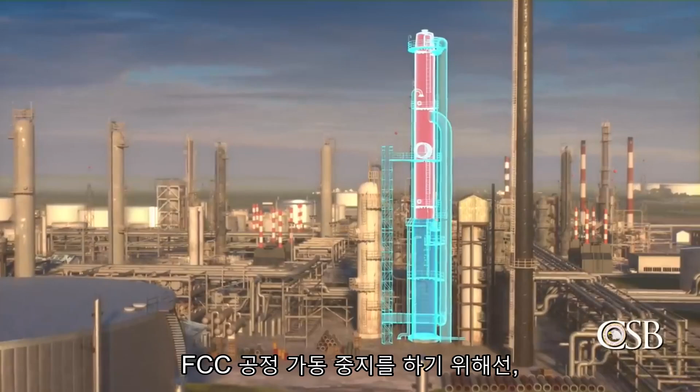To initiate the shutdown of the FCC unit, refinery workers stopped the flow of hydrocarbons to the reactor and closed the two slide valves connecting the reactor to the regenerator. Circulation of the catalyst stopped.

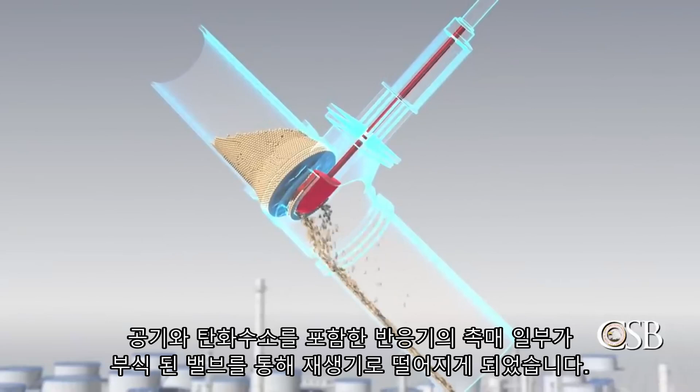But one of the two slide valves was eroded. Catalyst from the reactor fell through the valve to the regenerator, leaving an open path for air or hydrocarbons to flow between the two pieces of equipment.

Without other critical safeguards in place, air from the regenerator flowed backwards through the slide valve into the reactor. The air then moved into the main column and other equipment downstream of the reactor, where it formed a flammable mixture with hydrocarbons.

At approximately 10 a.m., the hazardous mixture of air and hydrocarbons found an ignition source, and there was a large explosion.

Debris from two vessels flew into the air. One piece traveled about 200 feet and hit a large above-ground storage tank, puncturing the side of the tank and releasing hot asphalt. Asphalt poured out of the tank over the containment berm and into the refinery's operating units, where it spread along the ground.

At around 12 p.m., the released asphalt ignited at the storage tank and a fire broke out. The fire traveled along the stream of asphalt to the refinery's crude and FCC units.

The fire produced a huge plume of black smoke, leading to the evacuation of a portion of the city of Superior. Typically, this type of asphalt fire can burn for days.

A plan to extinguish the massive asphalt fire was developed by the refinery's emergency response team. The refinery began to address the fire together with the Superior Fire Department.

They used a combination of dry chemical fire extinguisher and water to attack the fire from multiple directions and surround it within a containment area.

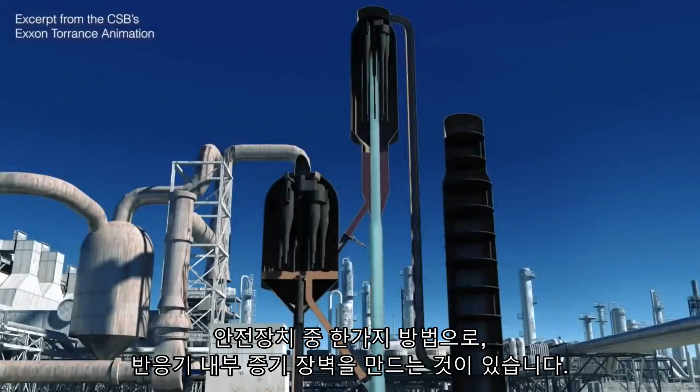But the CSB found that at the Superior Refinery, these safeguards were not implemented or were ineffective. One such safeguard is to create a reactor steam barrier, done by injecting a large amount of steam into the reactor, creating a higher pressure in the reactor than in the connected equipment.

This prevents air from the regenerator from flowing into the reactor, where it can then enter the main column and other equipment on the hydrocarbon side of the process.

However, Superior Refinery's shutdown procedure did not call for a reactor steam barrier, but instead instructed the board operator to maintain the regenerator at a higher pressure than the reactor at all times.

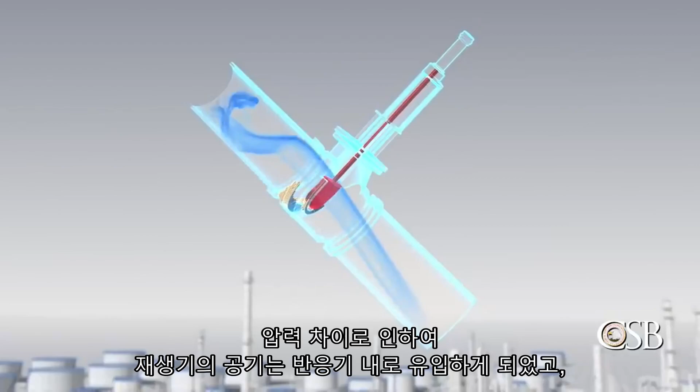Following these instructions set the refinery on a path toward disaster, as this hazardous pressure differential ensured that air from the regenerator would flow into the reactor and onward into the hydrocarbon side of the process, where a flammable mixture formed.

Another critical safeguard that should be in place during an FCC unit shutdown is to use natural gas or nitrogen to purge air from the main column to the flare system to prevent oxygen accumulation inside the equipment.

But the CSB found that even though Superior Refinery had the ability to purge air out of its main column, the refinery had not incorporated this safeguard into its operating procedures for transient operations or its operator training program.

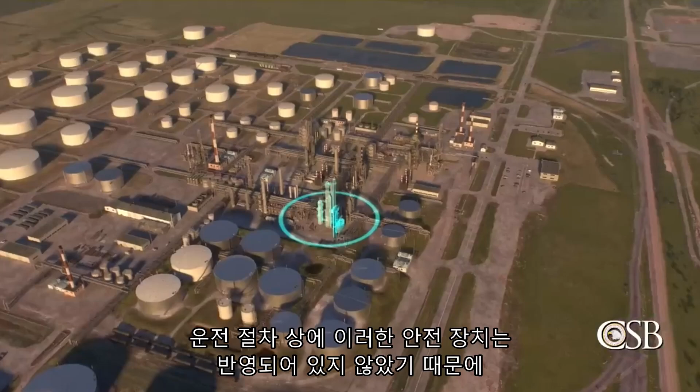So it was not done. Instead, the refinery overly relied on the catalyst slide valves to keep the air and hydrocarbon systems separated during the shutdown.

But slide valves are designed to control flow of catalyst during normal operations, not to prevent flow of air and hydrocarbons during a shutdown. And one of the slide valves was eroded after years of use.

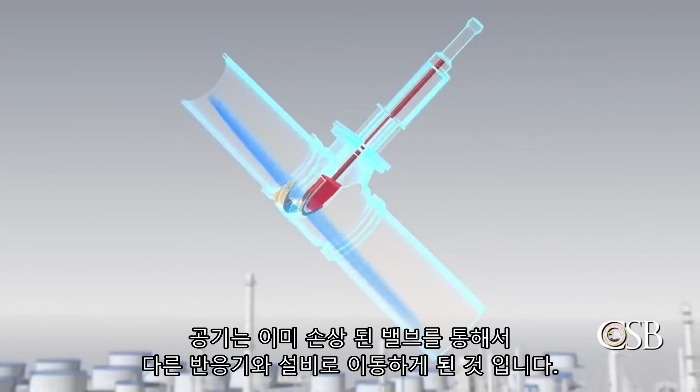Therefore, without other safeguards in place, air was readily available to pass from the regenerator through the worn slide valve into the reactor and onward into the hydrocarbon side of the process.

During transient operation for any process involving flammable materials, operators need to understand the potential for air to enter and accumulate inside equipment. Written procedures should be in place that outline safeguards meant to prevent air and hydrocarbon mixtures, and operators should be trained to understand why those safeguards are critical.

To that end, the CSB made a recommendation to the new owners of the refinery, Cenovus Energy, to establish safeguards to prevent explosions in the FCC unit during transient operation and incorporate these safeguards into written operating procedures.

The second safety issue found by the CSB is process knowledge. The CSB found that throughout the history of the Superior Refinery, under several owners, its FCC expertise was mostly in-house and with minimal engagement with other refineries.

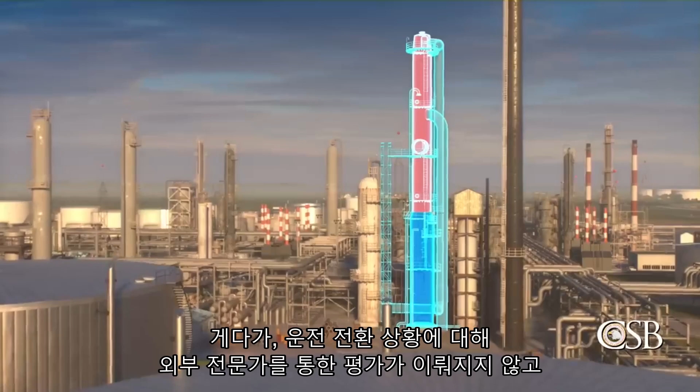In addition, the refinery's use of external technical experts was limited to assessing the FCC unit's performance during normal, not transient operations. The Superior Refinery required its operations department to review and recertify its operating procedures annually.

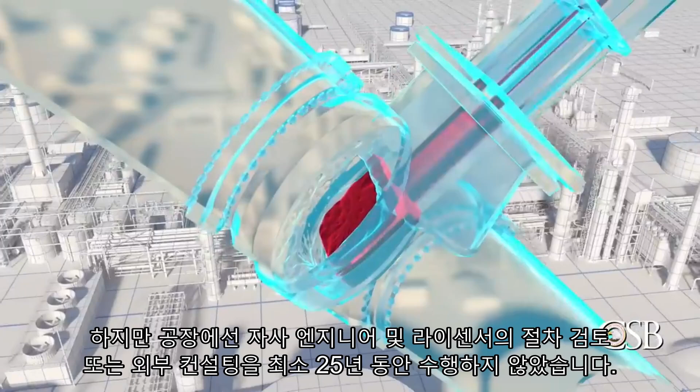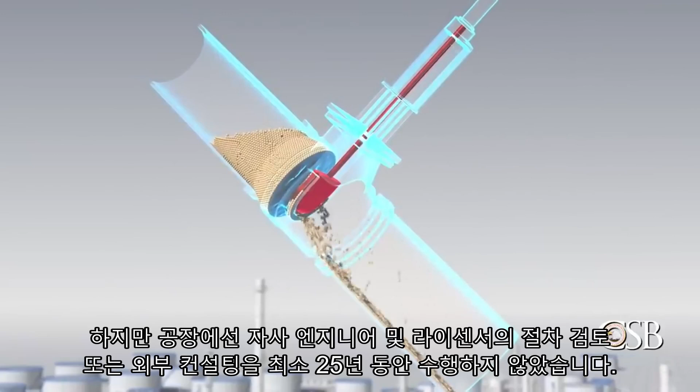But the refinery had not performed a technical review of its FCC unit operating procedures with its process engineers, the FCC technology licensor, or outside consultants for at least 25 years prior to the incident, and possibly since the unit was commissioned around 1960.

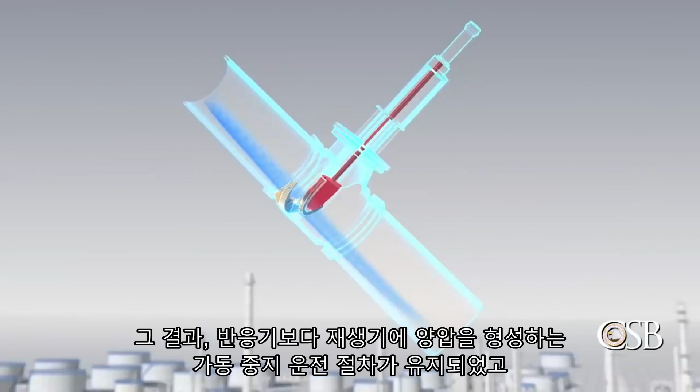As a result, the refinery's shutdown procedures, which instructed operators to maintain the regenerator at a higher pressure than the reactor at all times, directly contradicted the FCC technology licensor's guidance and created the dangerous condition that enabled the explosion to occur.

The Superior Refinery had serious errors in its FCC unit operating procedures that directly led to the explosion. But refinery employees did not have sufficient process knowledge of FCC unit technology to recognize the problem.

Had the refinery engaged with other sites or outside experts to review its operating procedures, the technical errors could have been identified and corrected, and the explosion could have been prevented.

Therefore, the CSB made a recommendation to Cenovus Energy to develop and implement a technology-specific knowledge-sharing network program across all Cenovus-operated refineries, which at a minimum includes an FCC technology peer network.

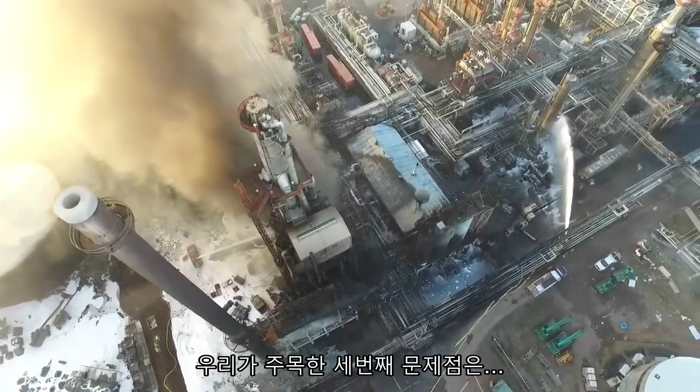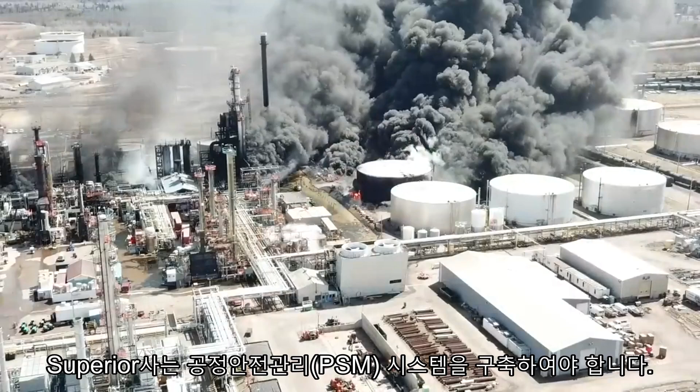The third safety issue highlighted by the CSB is process safety management systems. OSHA's Process Safety Management Standard and the EPA's Risk Management Plan rule require facilities like the Superior Refinery to implement process safety management systems. Process safety management, or PSM systems, are meant to identify, evaluate, and control process hazards.

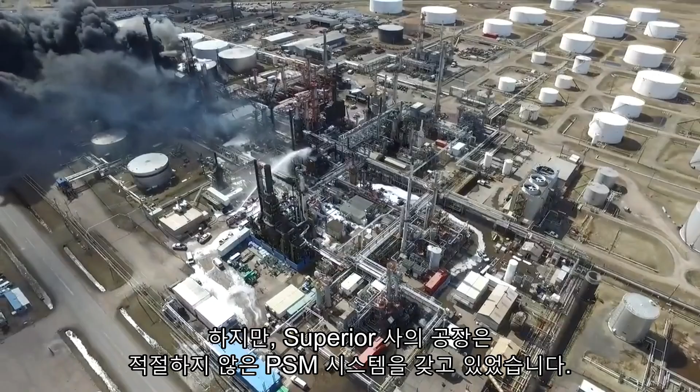But the CSB found that the refinery's PSM systems were inadequate. For instance, the refinery's process safety information did not include the operating manual published by the FCC technology licensor.

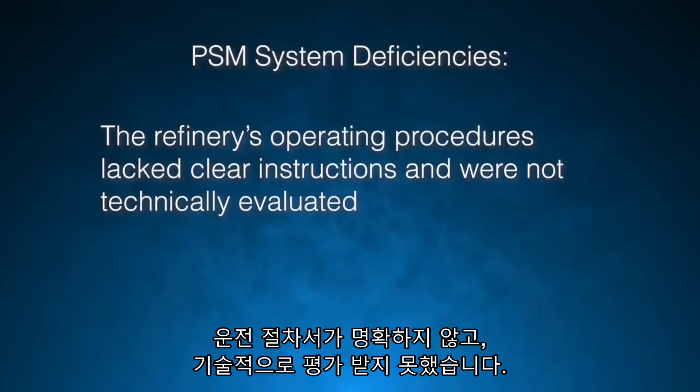Process hazard analyses performed at the refinery did not effectively identify hazards present during transient operations of the FCC unit, nor outline ways to control those hazards. The refinery's operating procedures lacked clear instructions and were not technically evaluated. And the operator training program at the refinery did not properly prepare operators to shut down the FCC unit safely.

The deficiencies we found in Superior Refinery's process safety management systems directly contributed to the explosion. To prevent catastrophic incidents, companies should ensure that their PSM systems are effective at identifying, evaluating, and controlling process hazards, not just during normal operations, but during transient operations as well.

As a result of its findings, the CSB made a recommendation to OSHA to develop guidance documents for performing process hazard analysis on operating procedures to address transient operation hazards in facilities with PSM-covered processes.

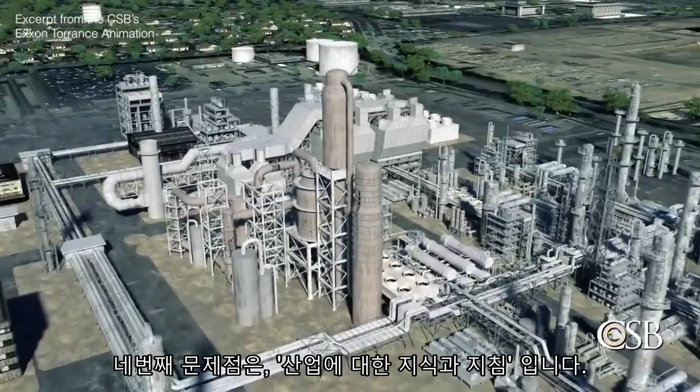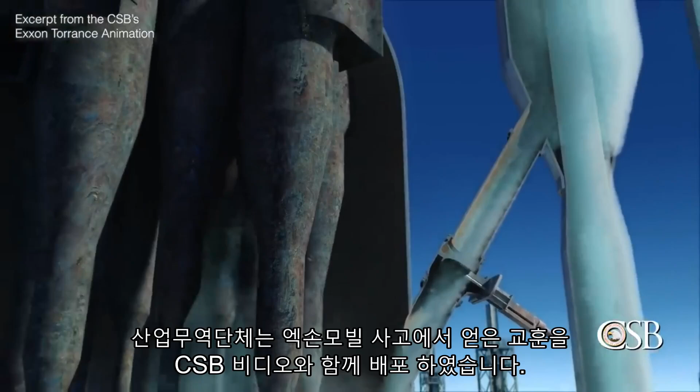The fourth safety issue found by the CSB is industry knowledge and guidance. The explosion at Superior Refinery occurred less than 1 year after the CSB released its report on a similar explosion at the ExxonMobil refinery in Torrance, California. Industry trade groups distributed lessons learned from the California incident, as well as the CSB's safety video on the explosion. But despite these educational efforts, employees at the Superior Refinery did not learn or apply these key lessons in a way that could have prevented the explosion at their refinery.

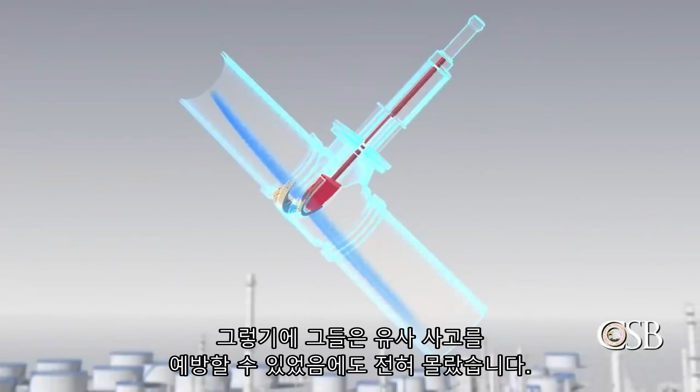For example, the workforce appeared to understand that flammable hydrocarbons had flowed from the California refinery's main column into the regenerator and subsequently exploded. But they did not recognize that the reverse was also possible. Therefore, they did not realize a similar explosion was preventable by implementing a reactor steam barrier.

In addition, there is currently no industry publication that establishes common basic process safety expectations for all FCC units. Although the refining industry has accumulated many years of FCC process safety knowledge from its members, this information is scattered, complex, and not easily accessible to some refinery employees.

The CSB believes that a publicly available technical publication outlining recognized and generally accepted good engineering practices for safe FCC operation and incorporating lessons learned from this and other similar CSB investigations could help drive important safety improvements in FCC units across the United States.

Therefore, the CSB made a recommendation to the American Petroleum Institute to develop a publicly available technical publication for the safe operation of FCC units that is applicable to both new and existing units.

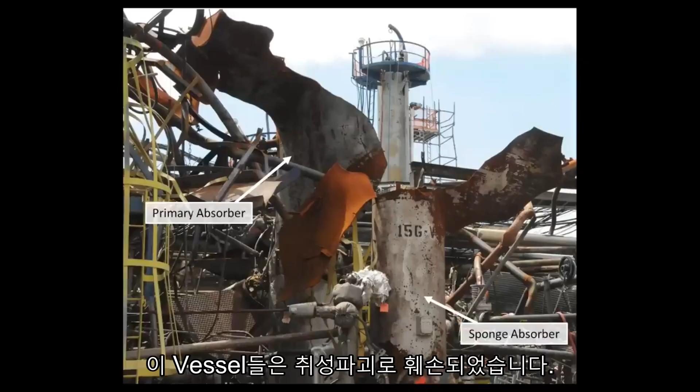The fifth safety issue outlined by the CSB is brittle fracture during extreme events. The two process vessels that exploded were constructed from a grade of steel that is no longer recommended for new equipment. The vessels failed by brittle fracture, which means that they shattered like breaking glass.

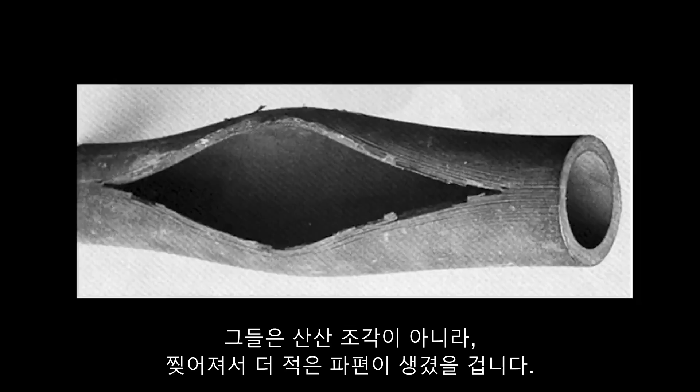When the vessels failed, the force of the explosion sent over 100 metal fragments from the shattered vessels around the refinery. One large piece struck and punctured the nearby asphalt tank. Had the process vessels been made of a new grade of steel with better toughness properties, they would have more likely torn open rather than shattered, resulting in fewer, if any, dangerous projectiles.

While some vessels may be deemed fit for service, they're not usually assessed for their performance during an explosion. Selecting materials of construction that are not susceptible to brittle fracture can help lessen the impact to the surroundings should an extreme event occur. The sixth and final safety issue noted by the CSB is emergency preparedness.

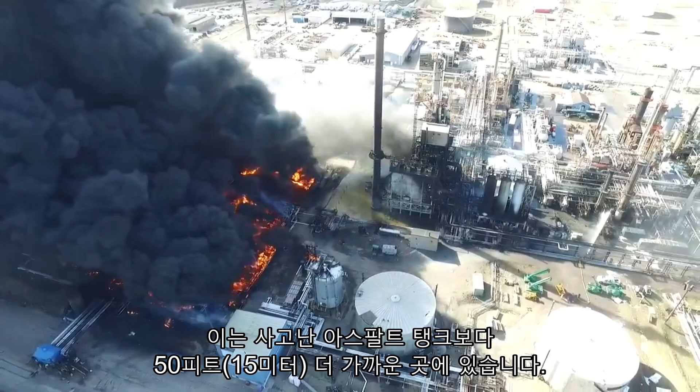The Superior Refinery uses highly toxic hydrofluoric acid, or HF, in its alkylation process. The HF storage tank was about 150 feet away from the two vessels that exploded, which is about 50 feet closer than the asphalt storage tank that was damaged. The HF tank was not punctured or otherwise compromised, but the CSB considers this incident to be a serious near-miss event with hydrofluoric acid.

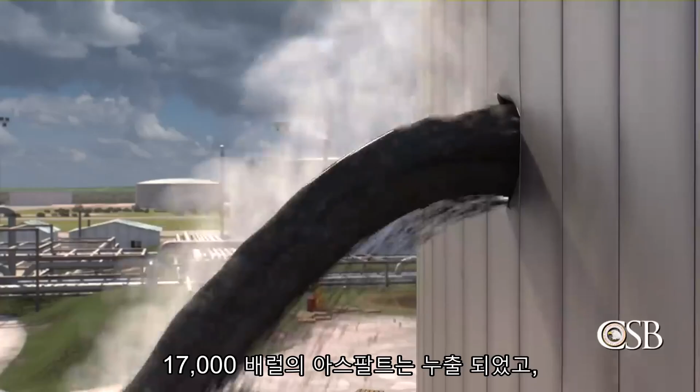Explosion debris did, however, puncture the asphalt storage tank, causing over 17,000 barrels of hot asphalt to spill out into the refinery, where it accumulated for approximately 2 hours before it ignited. It was only a matter of time until the spilled asphalt caught on fire.

Had emergency responders treated the asphalt as a flammable liquid, they could have taken more effective action sooner to control the asphalt spill before it ignited.

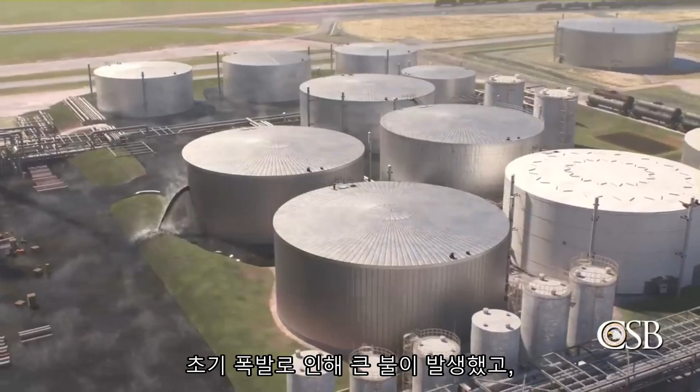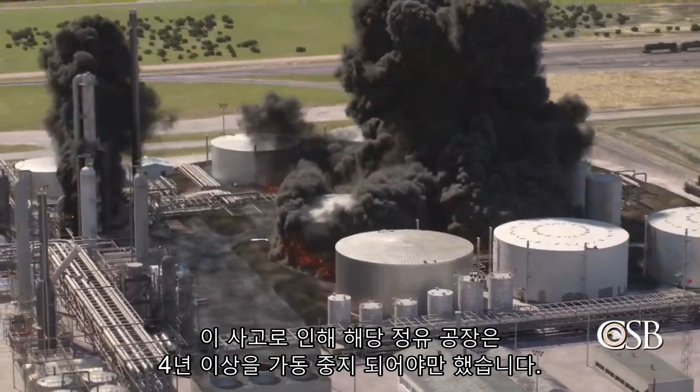The result is that the initial explosion escalated into a large fire that caused hundreds of millions of dollars in property damage. In addition, smoke from the fire and the potential for an HF release prompted the City of Superior evacuation order, causing disruption to over 2,500 members of the surrounding community. The refinery remained shut down for more than 4 years following this incident.

In response, the CSB made a recommendation to the EPA to develop a program that prioritizes and emphasizes inspections of FCC units in refineries that operate HF alkylation units to verify that safeguards that prevent explosions during transient operations are in place.

The incident at the Superior Refinery should serve as a wake-up call to other refineries, especially those that have hydrofluoric acid alkylation units. During transient operations like shutdowns and startups, refineries must have necessary safeguards in place and follow correct procedures to prevent disasters from occurring.